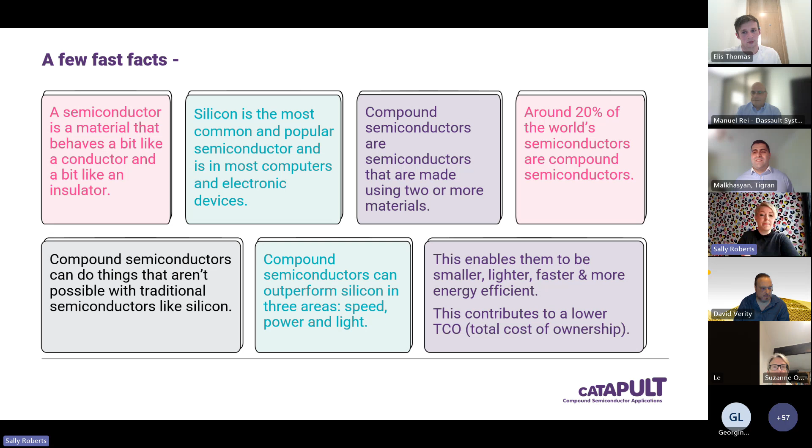So compound semiconductor technology unlocks new opportunities for innovation and efficiency across various industries. But continued investment into R&D is crucial for driving progress towards our net zero goals. So I'm going to take you through a few of the application areas in which CSA Catapult work and the role that the compound semiconductors play in building a sustainable future.

One of probably the first examples that comes to your head when you think of driving towards net zero, it's got the word drive in it, it's electric vehicles. So not only do we see it in things like scooters and cars, but also off highway, so trains, even things like tractors, agriculture, a lot of industries can benefit from this.

And compound semiconductors are essential in the development of these electric vehicles. By enabling the efficient management of power in electric drivetrains, it can lead to longer driving ranges and also faster charging times.

So GaN and SiC-based power electronics contribute to reducing the overall weight and size of these components. The image I've got there is of an inverter, which is based from silicon carbide. And this is a project that we worked on within the Catapult, with the end customer being BMW.

Now, we know that when we look at the automotive industry, cost is a major challenge, especially for widespread adoption. And additionally, ensuring the durability and reliability of these compound semiconductor components in the harsh environment is crucial. But from what we've seen on projects that we worked with, the benefits definitely outweigh the cost. And we all know that this is the path forward for helping to achieve decarbonisation and net zero in this industry.

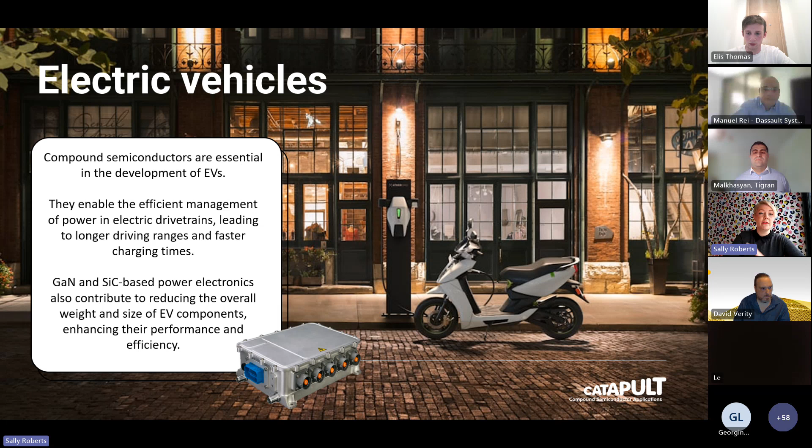The next area we work in, and this is my area, is telecoms. So you may have heard before, gallium nitride, gallium arsenide, indium phosphide, they're all crucial in telecommunications infrastructure, such as 5G networks, and obviously as we go on, 6G networks. So these materials enable high frequency and high speed communication systems.

So we need something that supports the growing demand for data transmission while minimizing energy consumption. In 2023, it was estimated that the telecoms industry is responsible for 2 to 3% of the total power consumption of humankind. I cannot emphasize enough how massive of a number that is. And base stations, like the image itself, consume 70% of the power consumption across the telecoms network.

Our own analysts within the Catapult have found that within a typical base station, power amplifiers, which is this chip here, can account for up to 80% of the power consumed. This shows how much of a sizable opportunity there is to drastically increase the energy efficiency by improving just one single device. Catapult analysis also shows that RF power amplifiers present one of the biggest market opportunities within the network, the global market set to grow to $9 billion by 2025.

Some of the challenges we see with telecoms are integration challenges, such as heat management and signal interference. This happens as communications become more complex and more compact, making everything smaller gets a lot hotter. Also, interoperability amongst different components and different systems is a challenge we see, but we are slowly starting to address. Our RF team has been involved in several R&D projects looking at optimizing energy efficient power amplifiers, through exploration of different architectures and increasing the linearity of these devices.

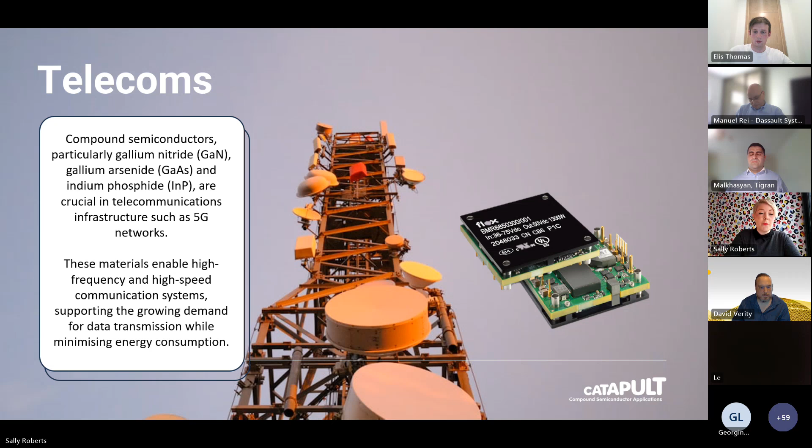We're looking at embedded die antenna in package, and again, this is putting the antenna into the chip itself, along with maybe a power amplifier. But it's really to make all the components smaller. So if you think of a massive base station, how do you get it down to a very, very small box that will be more inconspicuous and can be better integrated into our society so we don't feel like we're just living around loads of base stations?

And we're looking at RF beamforming and beam steering. How do we reduce interference and how do we make sure people are getting the right data? How is it getting to the macro cells or to the small cells? Also, we've started integrating it with photonics, so we look at RF over fiber for faster communications, photonic integrated circuits, and even things like beam steering with optical phased arrays. This uses LiDAR, light detection and ranging.

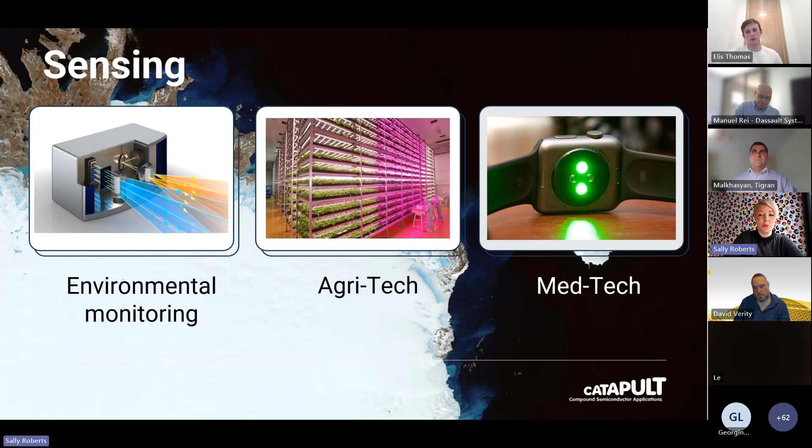The power of compound semiconductors and their applications cannot be underestimated. They are transforming how we will live and work in the future, and we're only just starting to scratch the surface of what we might accomplish and how we might use compound semiconductor applications to hit net zero targets and contribute to a more sustainable future.

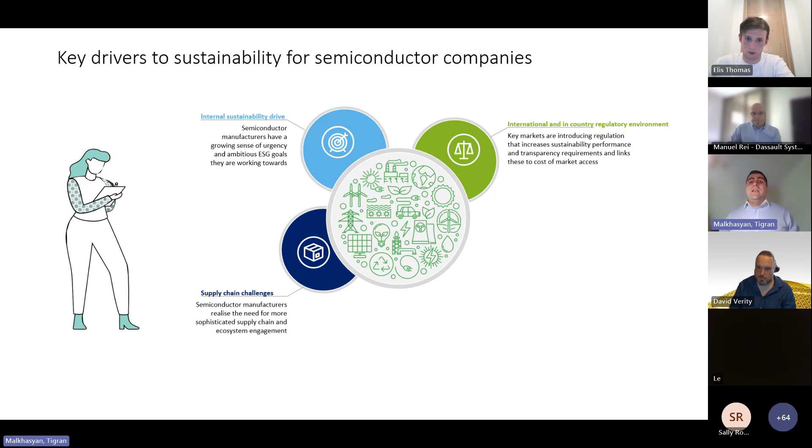Regulations. It would be great if we acted on our best behalf all the time, but usually governments don't trust us in that, so they hold us accountable with different types of laws and regulations. Just to show you the sheer volume of those regulations in terms of sustainability across the globe, all the major markets pretty much have them, and a lot more are in the works. There will be more regulations like this.

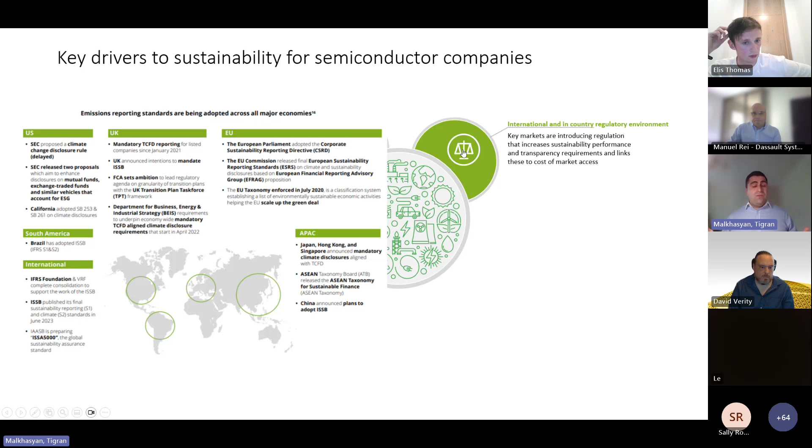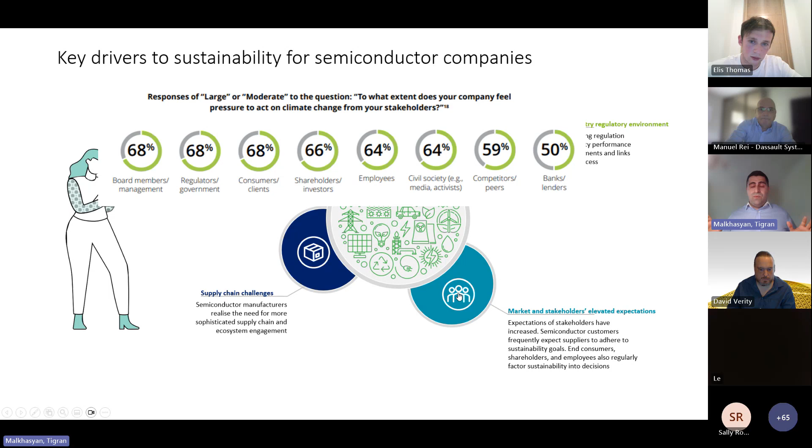Not only because companies are going to get fined, but also because you want to do the right thing. And there's external stakeholder pressure - all the stakeholders pressure. We had an interesting survey where we asked companies who is actually pressuring you for sustainability. It turns out everybody wants it - boards want it, regulators want it, employees want it, civil society, everybody wants this. Which means this probably will happen, which is a good thing.

Now, how are companies actually contributing to this, what kind of strategies are they employing, and what are they actually doing to achieve those goals. We've seen a couple of strategies popping up across the globe, and they're not mutually exclusive. Sometimes companies do a combination, sometimes they focus and double down on one of them, but there are a couple of things happening across the globe to help with this.

The first one is focusing on scope 1 and 2. That's a fancy way of saying we focus on what we're doing and making it better. Just for illustration, a 300 millimeter wafer fab can use in a day of production 15-20 million liters of water - an enormous amount. That's like 8 Olympic swimming pools, and the UK has only about 19 or 20 of them in total. And in a day, it can use up to 50,000 households worth of electricity, which is a huge amount of energy being used right there.

A lot of companies are recycling this water now as a target to address this, and a lot of companies are going for green electricity production, including on site as well.

And things like this are happening more and more. So scope 2 is when you try to buy electricity from greener sources, or transportation from renewables, etc.

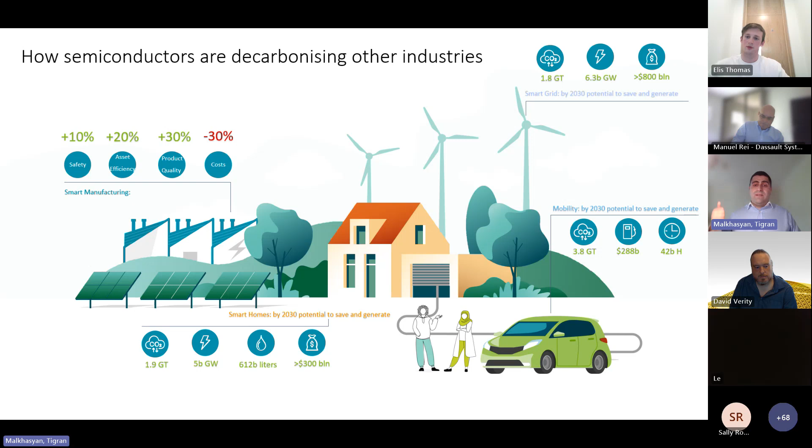Smart manufacturing, interesting enough, we already see, so there is a survey, we already see better production quality. So people are coming back to us and saying, yeah, actually smart manufacturing is helping produce better quality, safer, and actually reduce the costs.

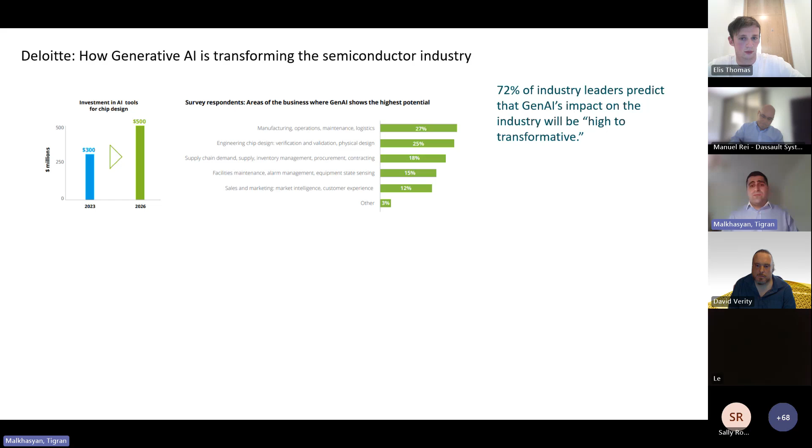And last one, probably just rushing through it, generative AI. 72% of the leaders actually reported that they expect high to transformative impact on the semiconductor industry using generative AI. They already spend a lot, but they're going to double the spending by 2026. The major areas where they see application is manufacturing operations, engineering design, and supply chain, all the back office stuff that Deloitte is also doing a lot of across the board. These are the places where we see potential value.

And just last 2 quick examples of the actual application of Gen AI in semiconductors. So when you produce all this stuff, you need very robust defect control. If something even very small is not working, you're just throwing it away. Traditionally, engineers are doing that, and it requires a lot of time. It's very time consuming, and this recognition process is quite difficult. Traditional AI is already doing this very well for the things that they know, for the patterns that they know. For the new ones, it takes a lot of engineers' time to actually retrain those models. And Gen AI is producing the data necessary to train both the engineers and the older models to actually recognize defects early on. It's very interesting that it's already there on the front lines.

Optimization, so there's design in terms of power, performance, and... I'm so sorry, you may have forced my hand. I'm really sorry, but just very conscious of time.

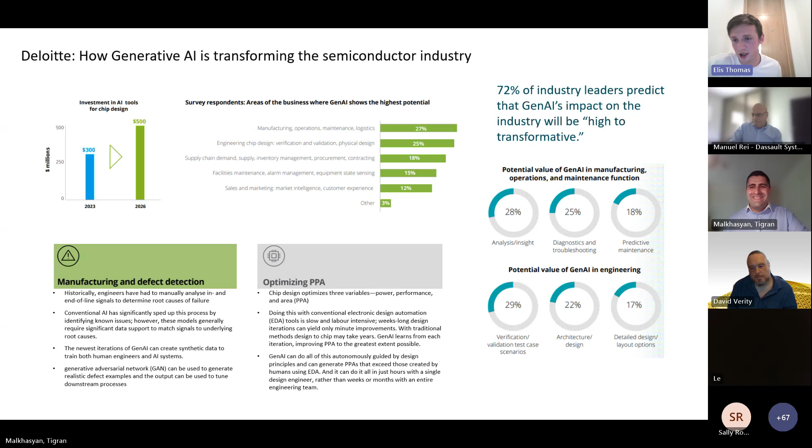Sorry, fascinating subject. Yes, as you said, there's something we can talk about all day, and if it's all right with you, I'm sure we're happy to send these slides to everyone afterwards as well. So sorry to do that, but super fascinating stuff, and I really liked that data you had at the beginning about the fact that everyone wants this, right? In terms of the drivers, this is something that stakeholders at every level are very keen for. It's a super interesting discussion again. Just as a quick nudge to anyone watching, if you have any questions about anything that was just discussed, please pop in the chat, because we'd love to unpack it after the presentations are done. So thank you so much, Tigran.

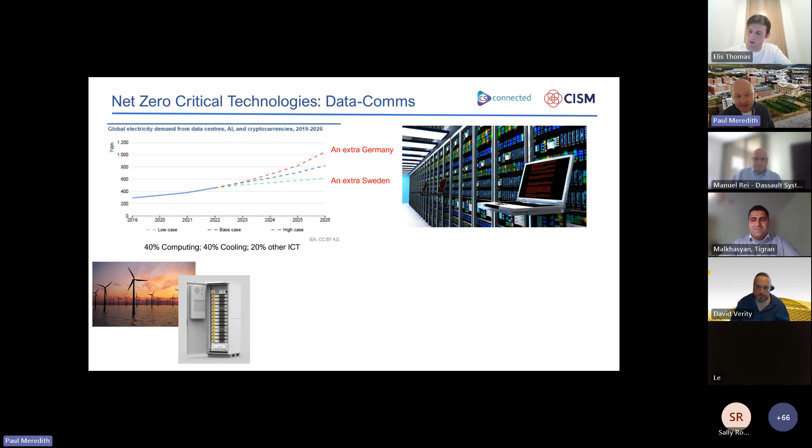So the industry is beginning to get its house in order in terms of consumption. Just so you're aware, by about 2026, even in the low case scenario, we're adding another country to the world's energy consumption just from data centers, which is an interesting analogy. So there's all sorts of green technology that we need to implement.

I'm a specialist in clean energy technology and everything around that, so my focus is always thinking about not only reducing consumption but how we feed clean power into these data centers. What we're seeing now is data centers around the world implementing a whole range of clean energy technology, from connecting themselves to big wind farms to using huge battery banks for backup power. In fact, the data center just built up in South Wales near Newport has something like 87 megavolt amps of diesel generators sitting on its site as backup.

That's a horrible, horrible scenario. If ever those generators were to start up, it would probably put a big cloud over Newport for two weeks. So we've got some real issues here.

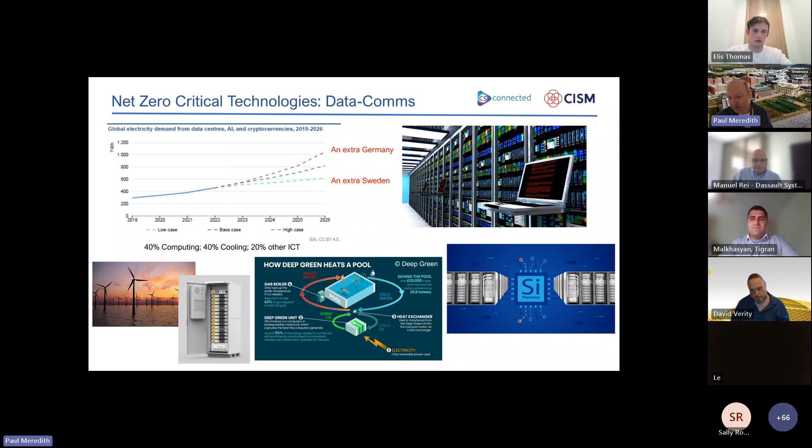We've talked about the issues with data center heat generation, and now the really exciting stuff going on with interconnections in silicon photonics. A typical data center has probably got data bit rates of something like 40 gigabits. Intel is predicting we're going to be up over 100 gigabits within the next two or three years, simply by implementing silicon photonic parallel multiplexing technology. So really interesting times there.

My speciality is semiconductors for clean energy generation, and many of you will have this technology in your houses or workplaces. The base of all of this is photovoltaic—the generation of volts from photons, the generation of electricity from light. Silicon is the dominant technology and has been for about 50 years, accounting for about 95% of the global market.

But we're now seeing new semiconductors, relatively new anyway, like cadmium telluride, which is a compound, starting to make a big impact. And then the really exotic top-end stuff, the III-V semiconductors, very efficient photovoltaic materials. These are the things driving photovoltaics into space, and driving really high-end concentrated photovoltaics—these huge plants you see in the desert, generating vast amounts of electricity.

I think David's probably going to touch on that from Pragmatic, but we also think about the next generation of semiconductors coming along—things called molecular semiconductors made from organic compounds and hybrid organic-inorganics, low embodied energy, very flexible types of semiconductors.

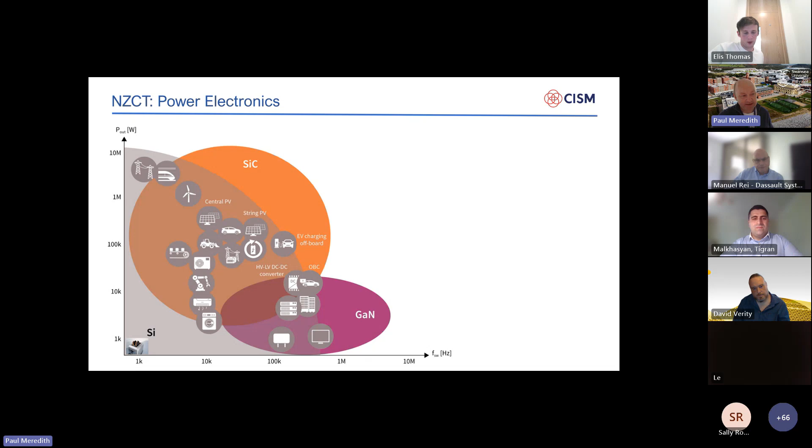You can see that EV charging onboard is right at the boundary between what silicon can do now and driving into silicon carbide and gallium nitride. So very exciting times. I drive an EV—I get 140 miles out of it. If I had a Tesla of the same battery, I'd probably get 220 miles out of it. The reason being my EV has silicon power electronics, and the Tesla that I can't afford has silicon carbide power electronics, which are much more efficient.

Okay, so what does the future look like? Net zero critical technologies emerging into the future—one thing nobody's mentioned yet is the interface between semiconductors and the human being: the creation of very efficient, energy efficient, healthcare efficient and cost efficient technology, based not just on pharmaceuticals, but on the integration of microelectronics into the body.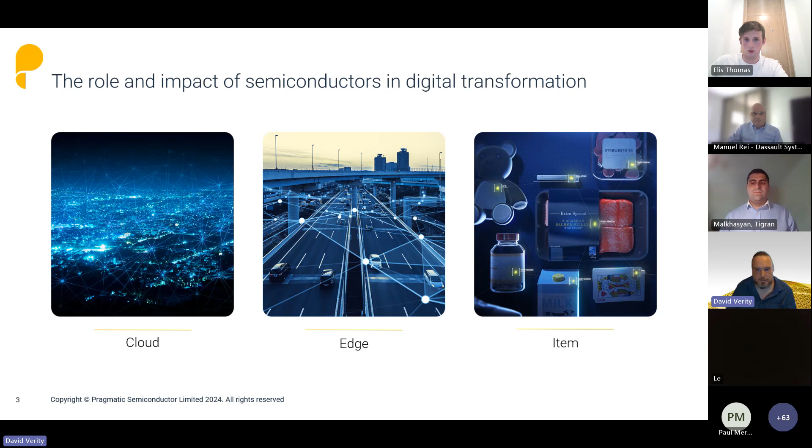These are just a few examples of how item level intelligence will help us, and there's a lot of scope across a lot of industries, including the semiconductor industry, to help play a role in that. However, there are a lot of challenges confronting the industry broadly, and some of the previous speakers have already touched on some of these things.

Supply chains in the semiconductor industry are extremely challenging. They're very complex, they can be very brittle. The demand for semiconductors changes dramatically over time, and new sources of supply are required to keep up with those changes in demand. Geopolitical tensions are paving the way for a need to rebalance and diversify the risks across the world. There are also skills shortages in the industry, so we need to be building a future pipeline where we can drive the future of the industry and bring people in who are going to help us solve some of the challenges we're talking about today.

And obviously the big one for today is sustainability. The semiconductor industry is making a lot of progress with regards to sustainability, with renewable energy, abatement, and recycling of materials. But it's a big challenge for all of us, and the item level intelligence we're talking about here cannot come at the expense of creating more emissions to generate that intelligence in the first place.

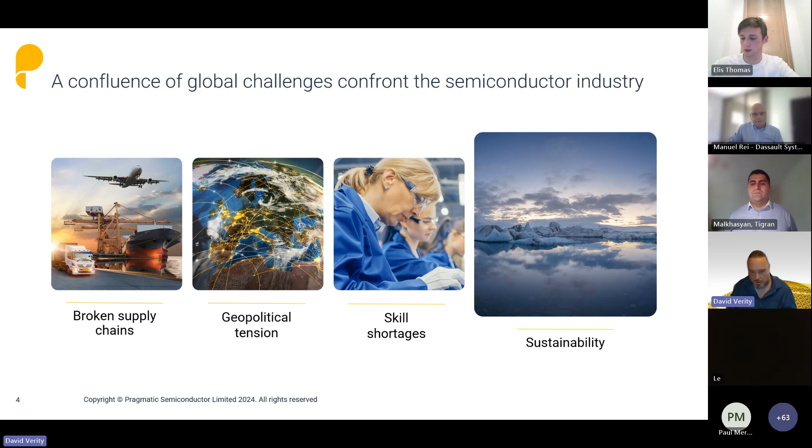When you're generating the foundation, the electronics and devices forming the basis of those strategies, there have to be some things which are true. The cost of creating that intelligence can't be higher than the value it creates. That intelligence has to integrate seamlessly with the item, it has to be invisible for all intents and purposes, and it has to be customizable and scalable to a whole range of different applications. If we're going to add item level intelligence to hundreds of billions of different devices, we can't be adding significant carbon footprint with every single chip and device we make. So our saying is: we want to be simply intelligent.

We're a world leader in the production of flexible ICs. Our technology is low cost, customizable, ultra thin, flexible, thinner than a human hair - our standard stack is just 30 microns thick, so it's easy to integrate into any item. It's more sustainable too: production has a much lower carbon footprint than traditional silicon-based semiconductors because we use innovative materials. There was some talk earlier about compound semiconductors - that's where we fit in, and our efficient manufacturing processes really help us along those lines, giving us the ability to create chips that can connect, sense, and have some compute capability with a low carbon footprint, enabling a new source of supply at scale.

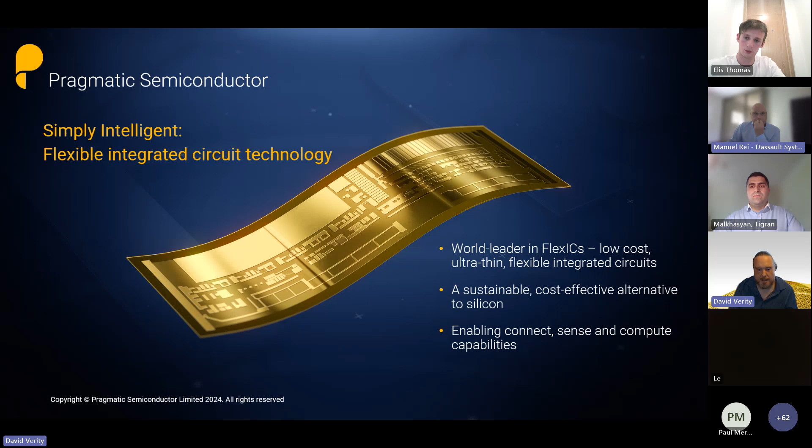This is a snapshot from our flagship 300mm wafer production line in the northeast of England, just outside Durham, which is entering volume production over the last few months. This production line, and others like it in the future, is capable of producing billions of flexible ICs, of flexible chips.

We deliver radical reductions not only in carbon footprint - we are orders of magnitude lower than the silicon industry - but we're also much lower cost in terms of development and production. We also offer an extremely short cycle time versus the months it usually takes to make silicon-based semiconductors. Our processes use less energy, less water, and less harmful chemicals than traditional semiconductor manufacture.

So as well as the technology being, from the foundations upwards, more sustainable, it also enables you to play a critical role in addressing some of the environmental and societal challenges that I've spoken about and some of the other speakers have spoken about today.

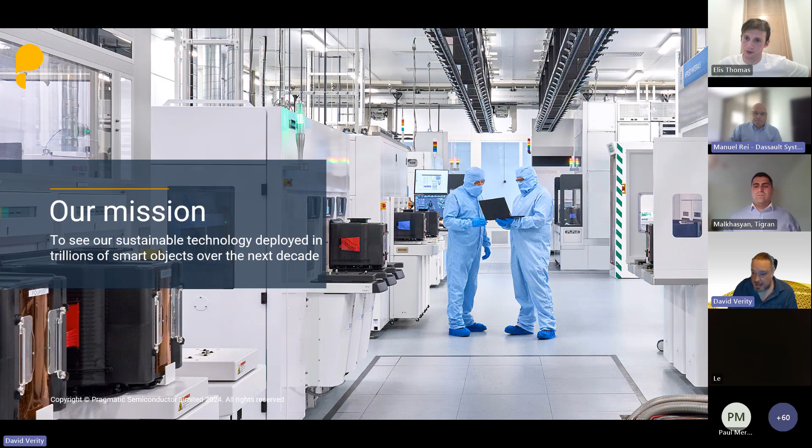That's everything I have for today, but thank you very much for your time and thank you very much for the opportunity to talk to you. Happy to go into more detail about anything that anyone needs, just reach out on our website or over socials to us.

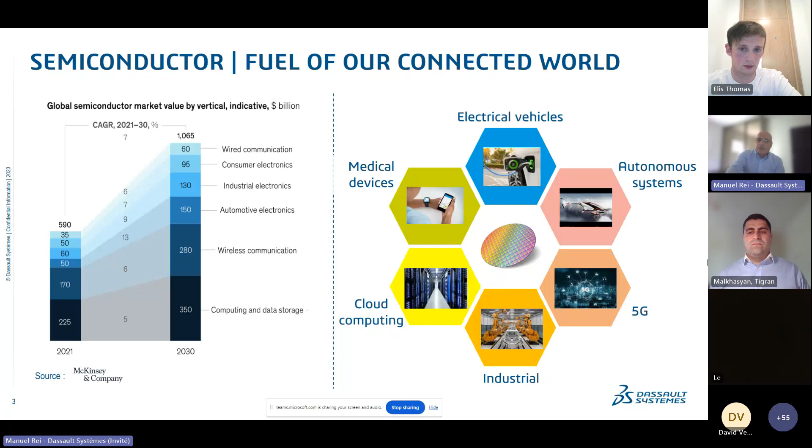So I would start my presentation by going into some evidence that semiconductor is the fuel of our connected world. Basically, semiconductors are used in almost everything, every object that we use today, and we are looking at some of the examples in my presentation today.

If we look at the challenges of semiconductor companies, innovation and system complexity is definitely probably the top one, but supply and sovereignty are coming also important. The one I would like to focus on today is really sustainability: how semiconductors put us in a position to produce better and greener electronic systems in order to reduce use, make them more reliable, repairable, reusable, refurbishable.

And at the end, recyclable. So our belief at Dassault Systèmes is that if you are able to create a virtual world, you are able to extend and improve the real world. By virtual world, we mean virtual twins. So let us now look at what we mean by a virtual twin.

Virtual twin experiences are scientifically accurate computer models of anything. They let you test any idea before you try it in real life, and they also help you make sustainable choices at every step.

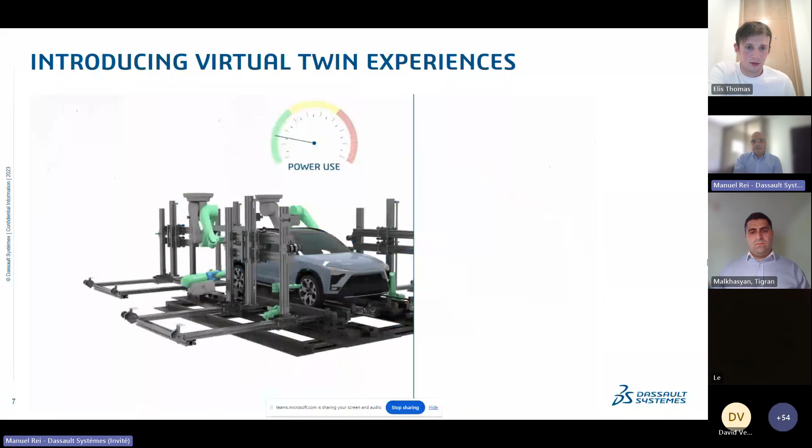New manufacturing plants designed for virtual twin experiences operate at top efficiency. As parts arrive and finished goods ship, virtual twins optimize transportation. They also build serviceability into product design, so repairs are easy and products last long.

A virtual twin shows all materials used in a product, so recyclers know what to recover and how. Virtual twin experiences optimize sustainability at every stage.

So as you can see, virtual twins can apply to almost every object in our life. And actually, Dassault Systèmes is also entering into the modeling of a virtual twin of a human, and that's definitely the next step of our strategy.

Now let's go back to semiconductor. Here you can see an example of all the different virtual twins we can create dedicated to semiconductor, starting from the virtual twin of the reactor where the wafer will be infused. We can also model the manufacturing process, and create a virtual twin of the equipment that will produce it. We can put them together to create the factory virtual twin, and then use that to create any ecosystem virtual twin, managed and powered by electronic systems and semiconductors.

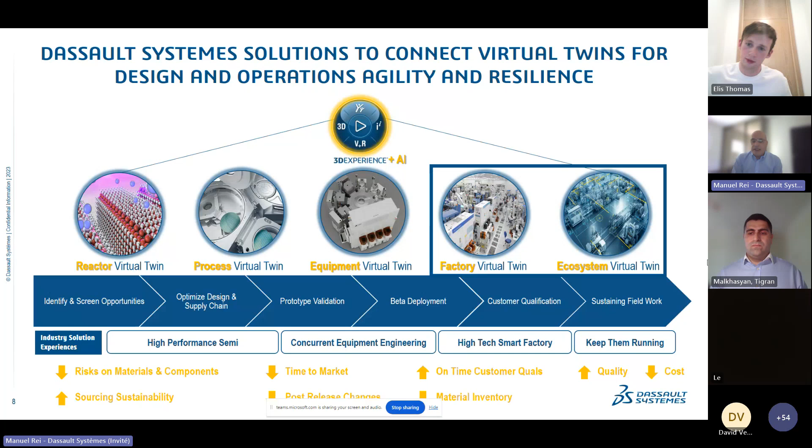Now let's have a look at very specific use cases. For today's presentation, I am going to focus on the factory virtual twin and two use cases on an ecosystem virtual twin. The first, I would like to share an example of a clean room virtual twin that we are developing with Purdue University in the US.

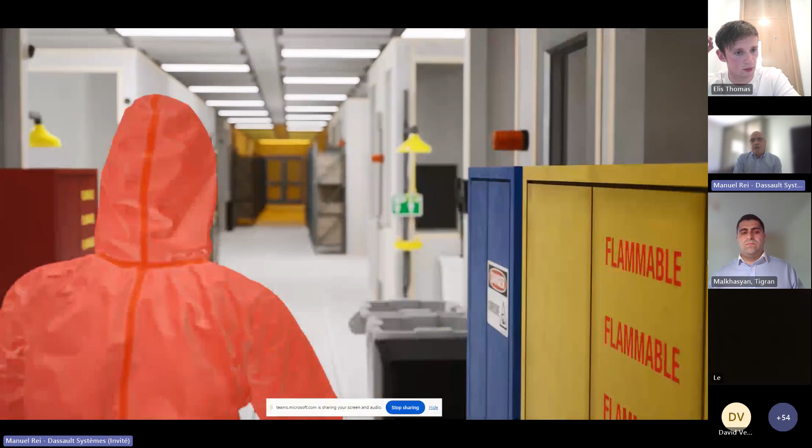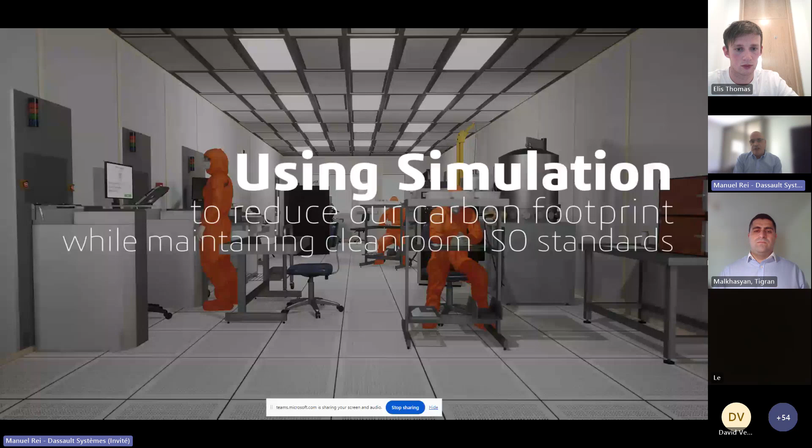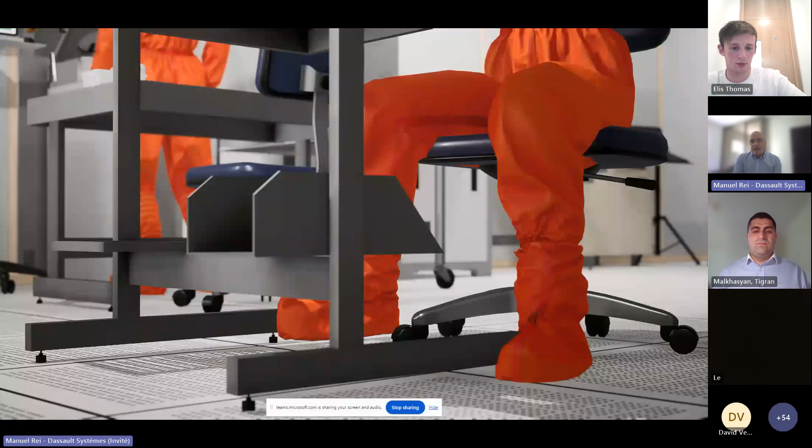Basically, what you can see here is that we are able to model everything, any object that will be available in the clean room, and we are able to use different simulations. For example, here we are looking at how the airflow will make sure particles stay away from critical zones. We have an example with a chemical reactor and a human close to it, and we're able to make sure that the level of particles moved by the airflow is really within standards.

We can also use virtual twins in order to train and develop staff. So those are two examples of what the virtual twin will bring to a company running a clean room, or to a university training students on a clean room virtual twin.

My second example here is about automotive. We all have a car. We know we are going into autonomous driving. Autonomous driving means the car will drive itself, but in order to certify such a car, we will need to drive it more than 8 million miles. Driving 8 million miles is almost impossible because it would take years to happen.

So the solution is, instead of running a physical car, you run a virtual car in a virtual twin environment, so that you can accelerate the time and drive those 8 million miles in a matter of weeks, hours, or days. So let's see now an example.

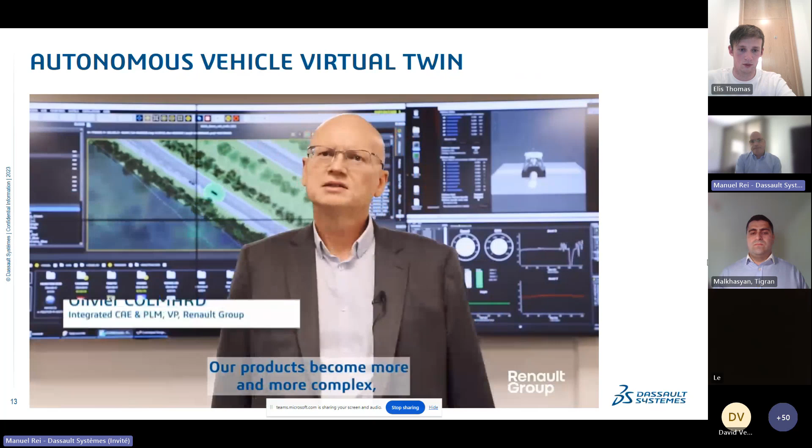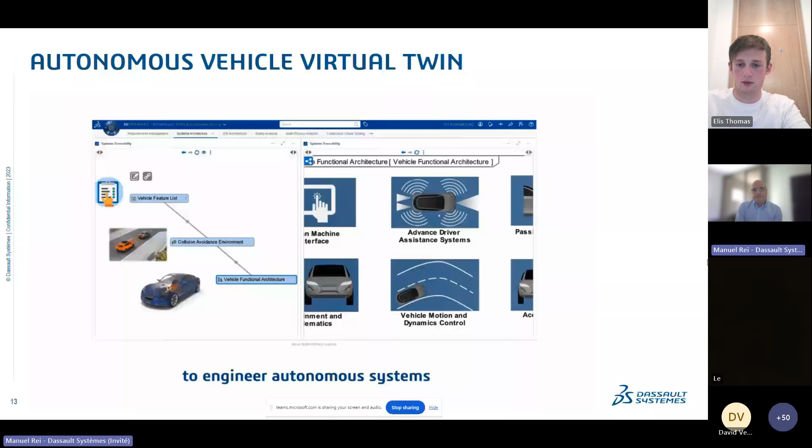Our products become more and more complex with connected, autonomous and electrified vehicles. At Renault, we develop industry solutions for advanced driver assistance systems and autonomous driving development. With Dassault Systèmes, we have a common goal to engineer autonomous systems that will be free of bugs when the real vehicle hits the road. We are partnering with AD Simulation to run massive simulations of autonomous driving.

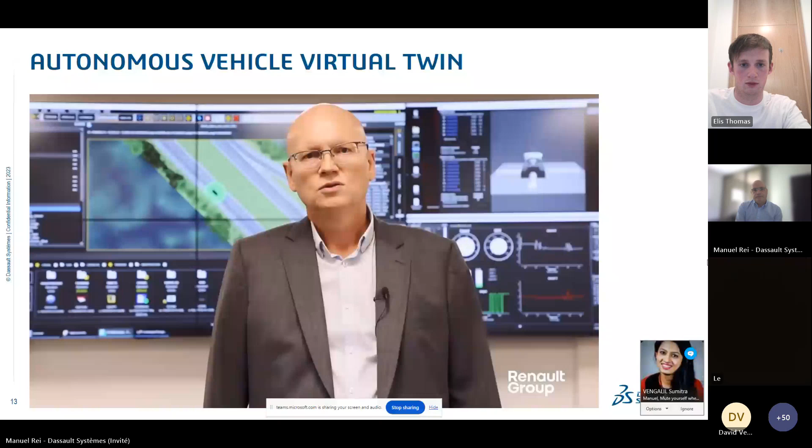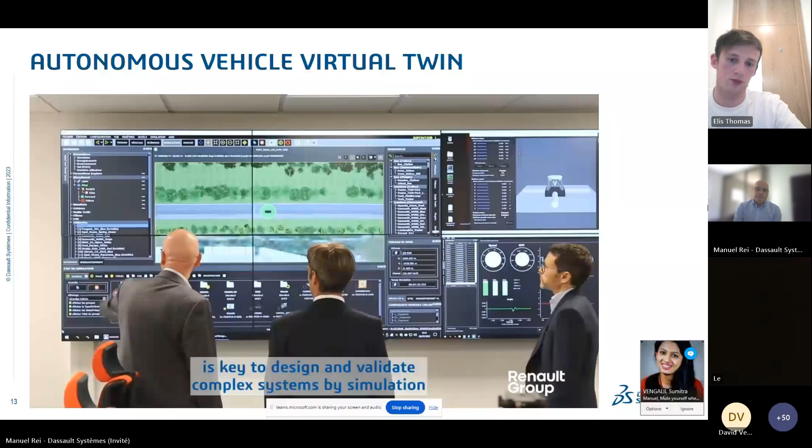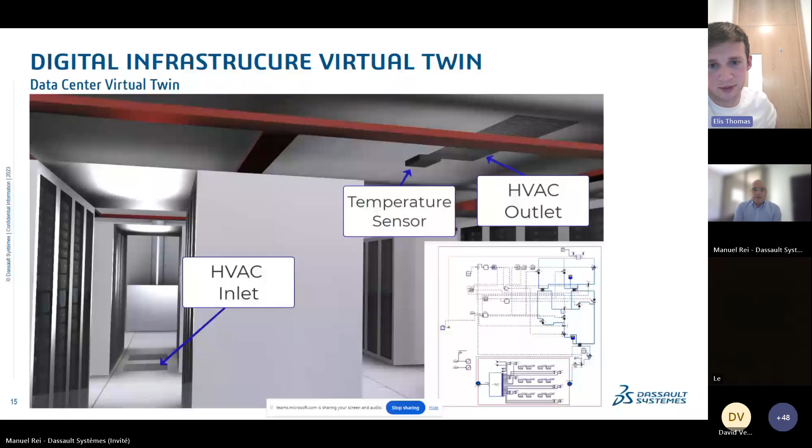Manuel, I think the video is slightly laggy there, and we lost sound near the end. Manuel, you're muted. Manuel. Manuel, I think you're on mute. Hello, Manuel, can you hear us? Hello?

Yes, I can hear you, Elis. Sorry, I did not realize that I was on mute. Right, I think the video started to lag near the end.

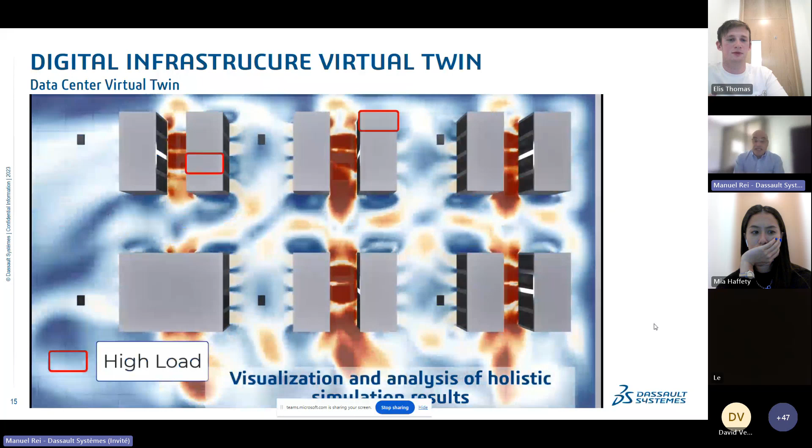So do you see my slide? Yes. Okay, so in this example here, we are in a data center. This is the virtual twin of a data center. We have modeled the heat flow system, and we are measuring the temperature at different points of the data center. So we want to optimize the cooling system of the data center in order to minimize the electrical consumption and operate the data center at the highest possible efficiency.

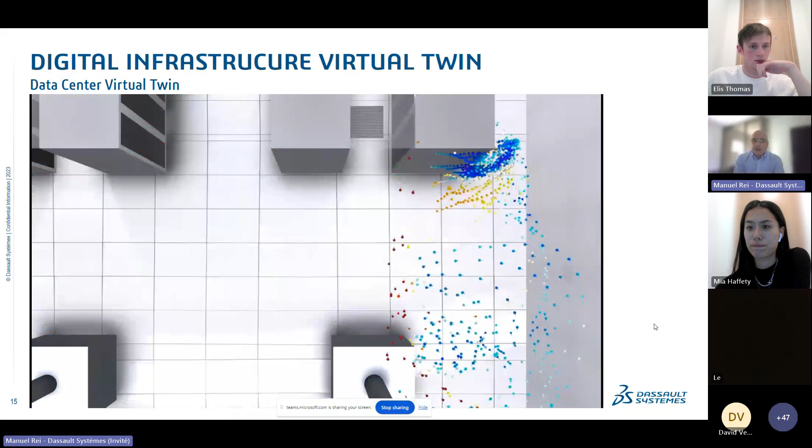And here we have a use case where we found unexplained high temperature in some locations. So we simulate and can see where these locations are, and we also take decisions to reduce the server load in order to try to minimize the electrical consumption.

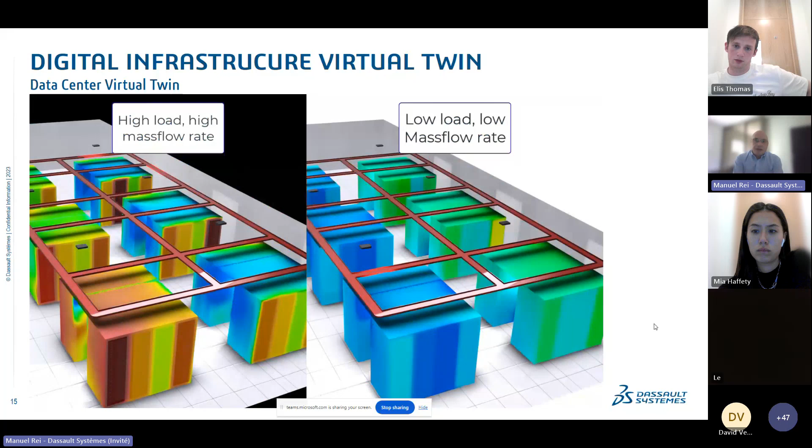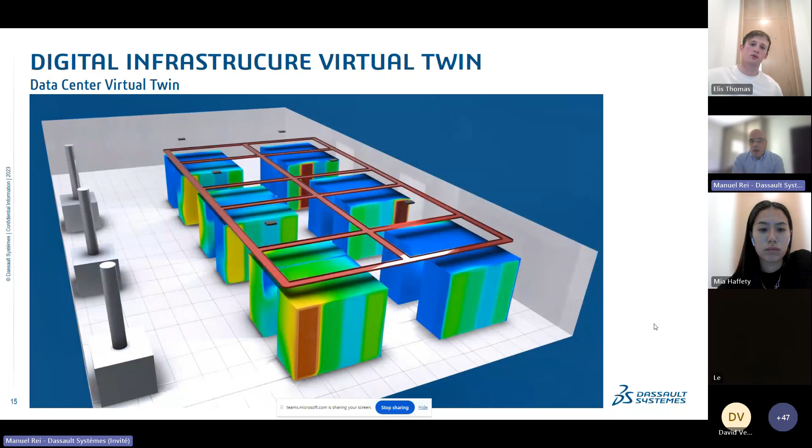And for that, we are using the virtual twin in order to control the cooling system and input different parameters. Here we are actually injecting a fault. We stop the air cooling, and we can see the point where the server is going to reach the temperature where it will shut off.

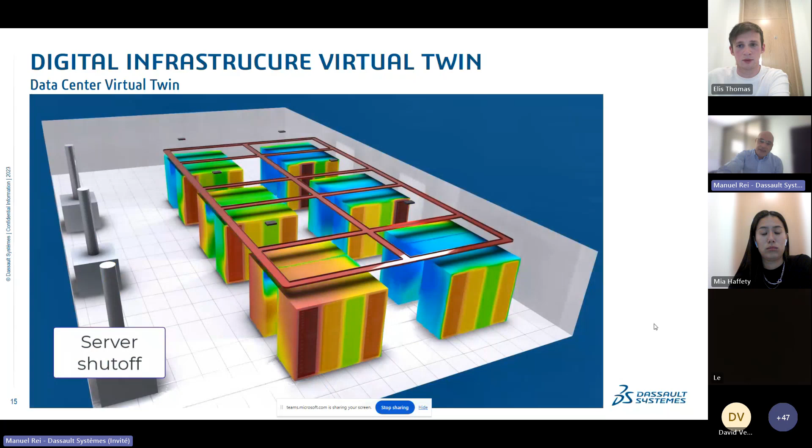So this is definitely a simple example of all the capabilities of the what-if scenarios that can be run on a virtual twin. And in my presentation, what I wanted to show you is, first of all, that with virtual twins, you are able to virtualize almost anything, and perform a lot of different scenarios, different parameters, different experiments that you can try without wasting any physical resources in order to find the best, most suitable, and optimized solution.

And if we use virtual twins to develop products that we are going to sell and provide to the world, then we will make these products more sustainable and greener. So that was the message I wanted to share with you today.